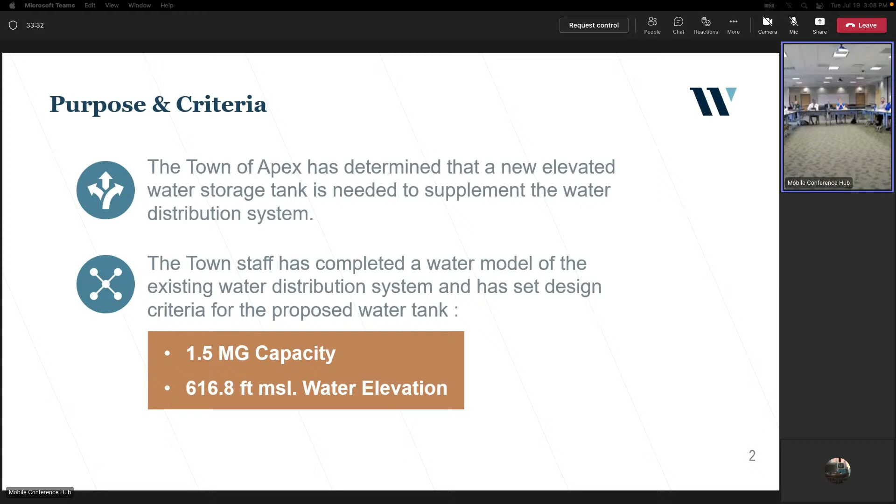The criteria established initially came from running the water model the town has for their existing water distribution system. We determined that we need 1.5 million gallons of water storage, and we need to maintain the water elevation in that tank to be equal to the existing tanks. Now, we will help distribute.

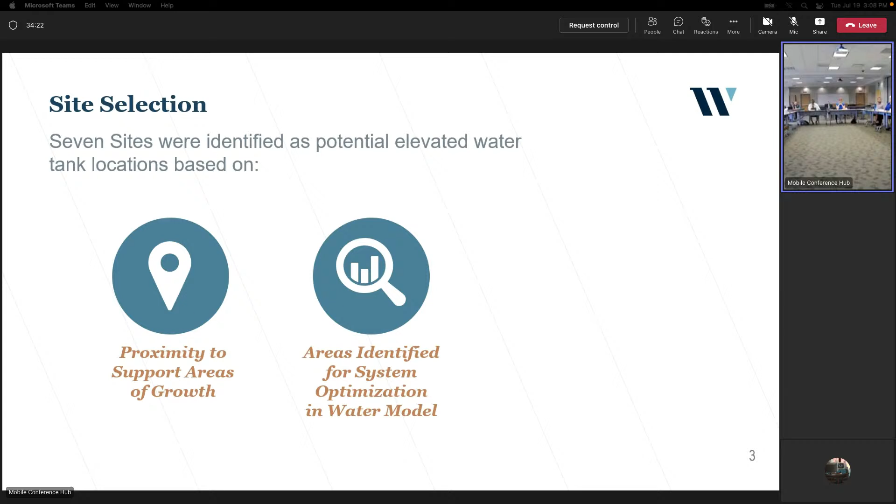Big, broad points: one, proximity to growth areas. Where are we growing? Where do we need this extra storage? So we look at the water model. Where does that show we need a tank? Where's the extra pressure needed? Where's extra storage needed in the system? And then, where can we put the tank? One important thing here is just because it's technically the best place doesn't mean that it's feasible.

Can you go back real quick and describe why being spread out matters? I don't quite understand the science of water tank storage.

When you put in elevated water storage, it runs through a pipe into every house throughout the town. The farther the pipe runs, the less pressure is available, so you're losing pressure along the lines. If we spread those tanks out and the system's all connected, we can boost that pressure throughout town as the tanks are spread out. Does that make sense? Yeah.

Is there a model of where we're lacking pressure or where we'd like more pressure today, or is this more about where it's going to be in 10 or 15 years?

I think it's a little bit of both. The current water model the town maintains, and it's not run by us I don't think, gave us information on general areas of need. We're currently working on a long-range water resources plan, a separate project that will project our water use needs 50 years out into the future. So we'll be hearing about that.

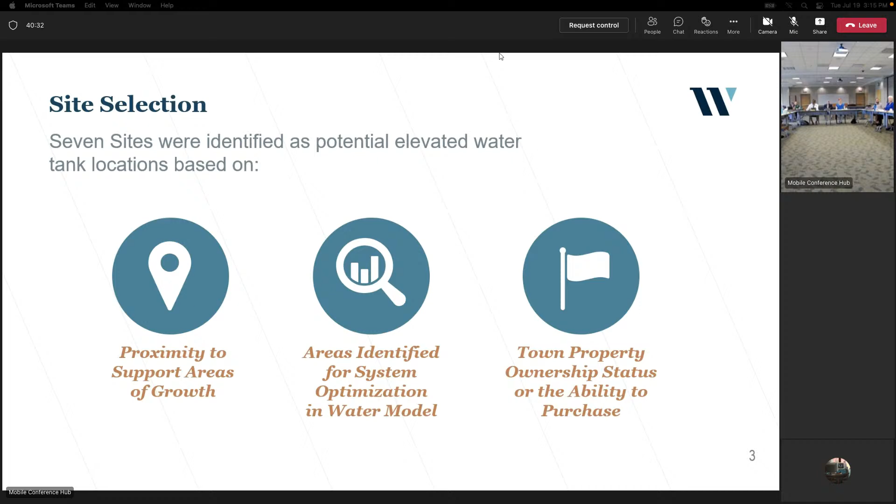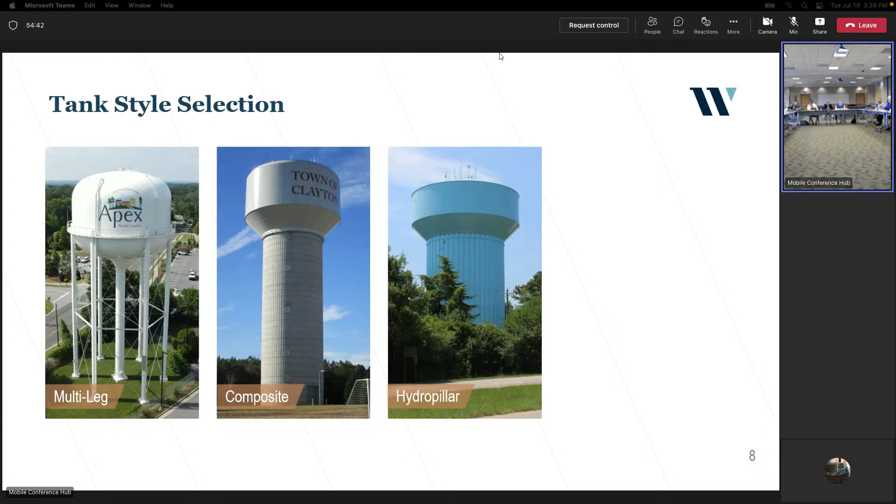Okay, so the second criteria, or the second thing we evaluated, was tank style. Those are the 4 styles, the multi-leg tank the town has now. We have 3 downtown tanks. Composite tank, which is basically a concrete center column with a steel tank on top. Hydropillar, similar, but it's a steel column with a steel tank on top. And then a sphere.

Again, we looked at objective criteria: capital cost to install, what's it going to cost to maintain, how does it look. The newer ones have more interior space - what else can we do in that area? We need to fence it off and block that area away. And then, communication - is it available to lease out for a cell phone tower?

And life cycle - let's put some of that stuff together. So again, these are not equal criteria, and we weighted those accordingly. Notice the cost was about 70% of the evaluation here. And then the composite tank was the highest scoring by a good bit, mostly because it's the cheapest to install, has the second lowest maintenance cost, which led to the lowest 20-year life cycle cost. It also offered the interior space - you have some options to do something with there.

Was there an attempt to marry the location with the interior space benefit - does that matter more at a park versus by itself? It seems like it to me. It could. It can be used for just about anything.

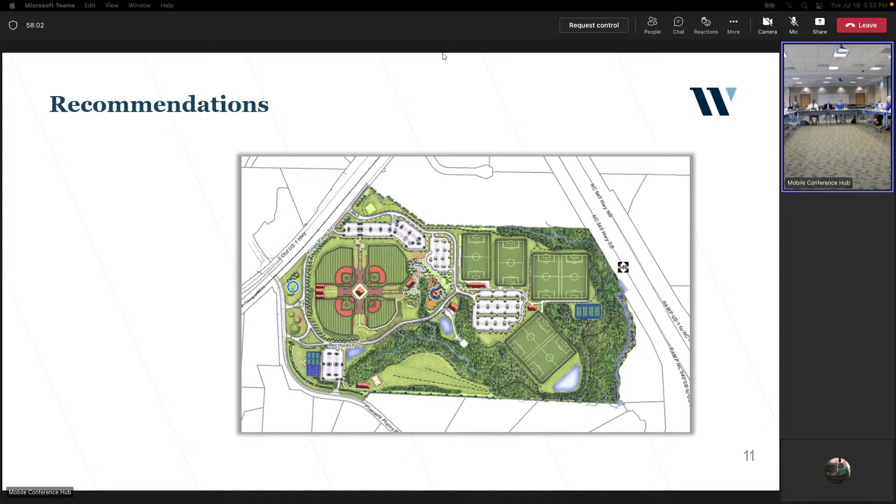So for recommendations, you see the little blue circle on the map of Pleasant Park - that is roughly the size of the composite tank. You can see the footprint. Is that the base or the top? That's the top - the top of the tank is about 87 feet.

Are there any concerns about consistency across our water tanks, or is that too much of an issue? To me, if we've got a bunch of multi-leg ones now, why aren't we getting another one? We talked about that, I have a slide on this. But yeah, it's really not a concern there. What this is showing is really site specific - there are times when maybe we would recommend a multi-leg tank like you have now, but we're moving out of town, it's a new location, and the consistency isn't like the 3 tanks you have now clustered together. This will be all by itself. I'm just good from the aesthetics standpoint.

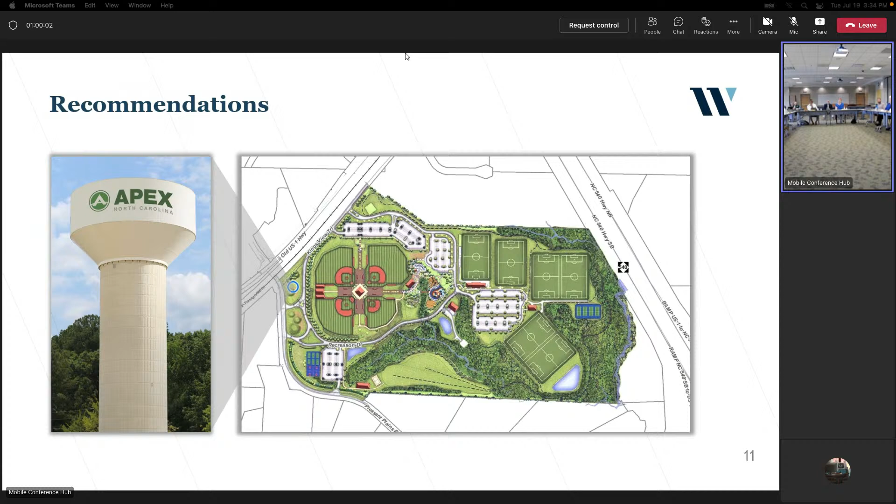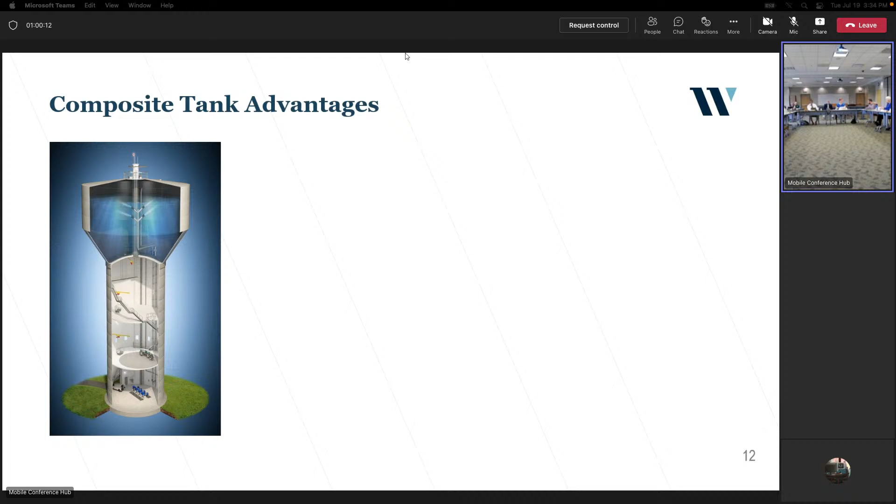Along with that, you do have the multi-leg tanks now, and this would be a change. I'm saying, for the composite tank, the advantages are a little bit lower capital cost and lower maintenance cost. You have a concrete column there, so there's no maintenance - not having to go out and paint that on a regular basis. You still have to maintain the steel tank itself, which still has to be painted and coated on a regular basis like you do now, but you eliminate that extra painting of the leg.

Also, it gives you some additional uses like we talked about. You're looking at about a 50-foot diameter column. There's potential here for office space, conference space, storage - towns doing remote fire stations, EMS stations, police stations could use this. A standard tank with nothing extra still comes with overhead doors, and you still have clearly room to drive trucks in for maintenance on the pumps, the piping, or just for storage, or for a remote fire truck.

Some other things to note - you can see in the picture the stairwell is inside, so you're not climbing up a ladder outside in the weather. You're in a building climbing a staircase, so the safety - you get much higher safety.

Any piping or any of the communication wiring throughout all comes through that central column. There's not wires hanging up the side of the building, out the side of the tank. So aesthetically, again, it's a much cleaner and more modern look.

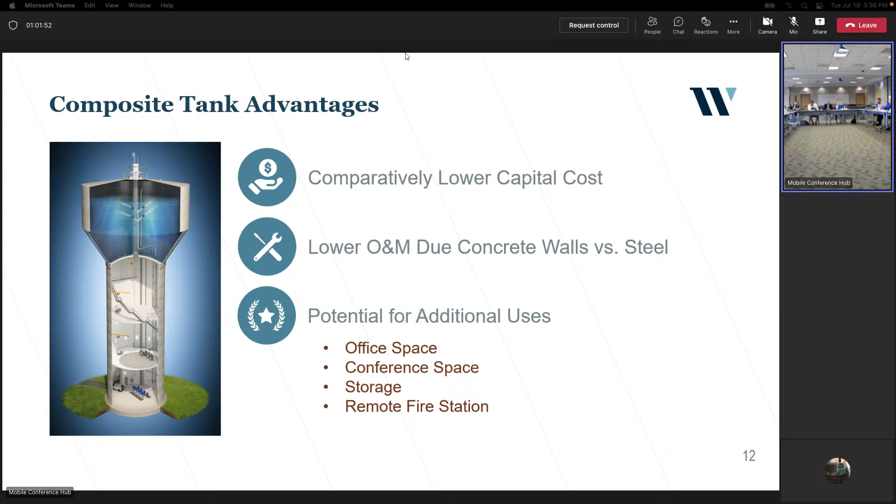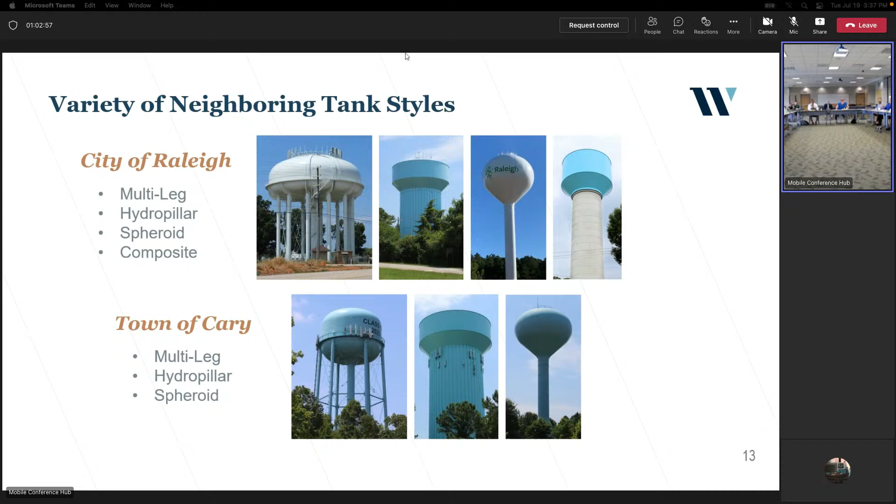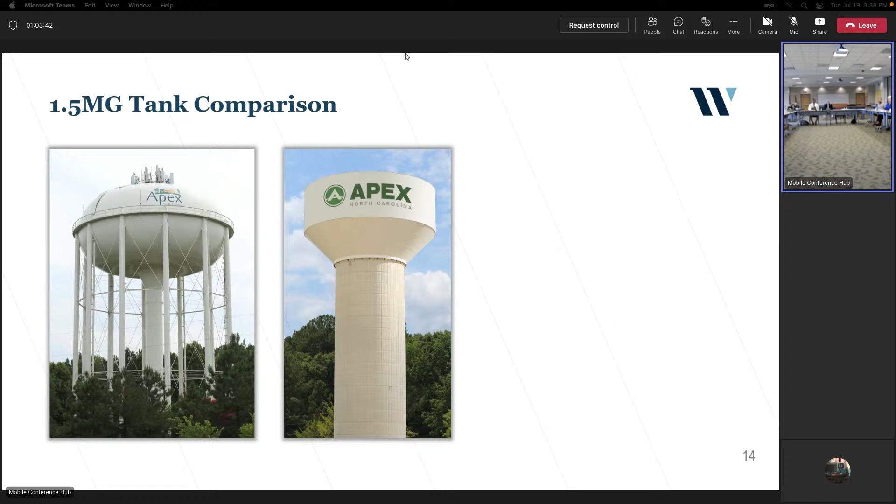Well, that - thank you so much. Anything? Done? I'm no, okay.

Did you want to go over that table in the back of that packet? Just to talk about one of the things that hasn't been discussed yet - the FAA potential requirements.

I don't know how your thoughts may change if we had to paint that tank a checkerboard orange color. That may be an FAA requirement. That's to be determined - I believe David may have the latest information about that.

Other than that, I haven't heard back from the FAA yet. We've submitted the application and we're still waiting to hear back. You see those types of tanks near PTI in Greensboro, Camp Lejeune, Cherry Point - they're all over the place. Worst case would be the entire bowl has to be that checkerboard pattern, which I think, at least in our opinion, would probably be a deal killer.

Alternatively to that, it could just be lighting. It could just be that checkerboard is painted on the tank, which you wouldn't be able to see from ground level.

But that is something David said, whatever 5-6 weeks, we're waiting on an answer of what they're going to actually require, just due to proximity.

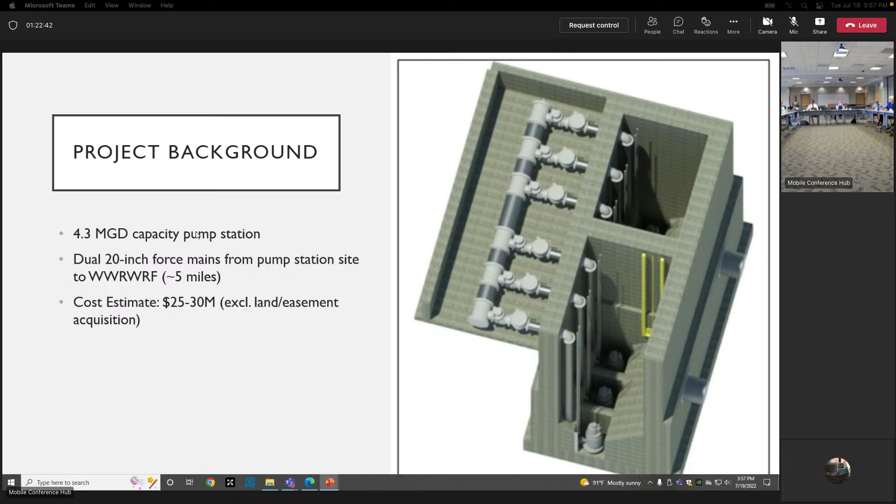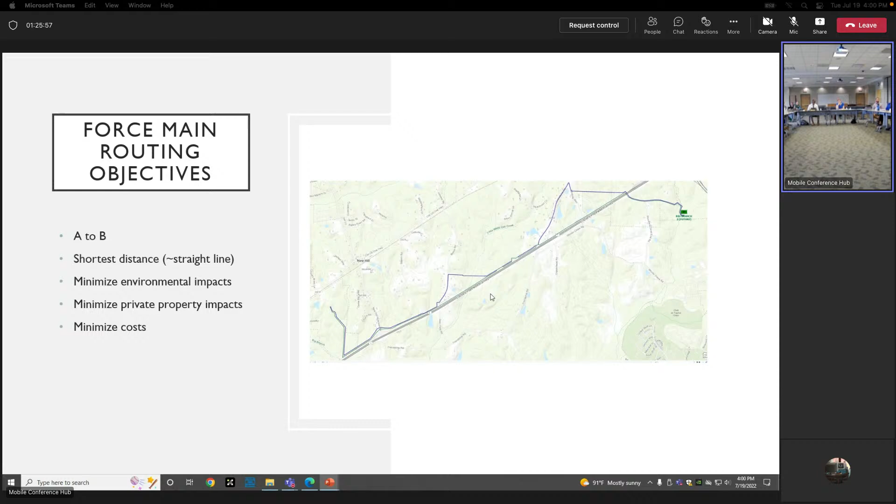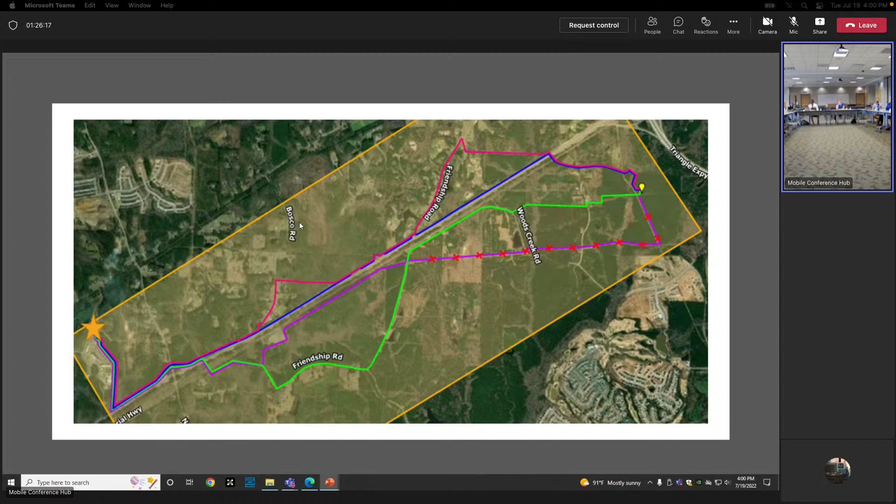We also looked at several other options, including some that are south of US 1, and some, this one up here, would be in easements on the side of US 1. So we narrowed it down during the preliminary engineering phase to these two alternatives.

It's kind of hard to see, but that blue line there is roughly what it would be if we're able to install it in the US 1 right of way. The purple line is the next best thing, installing in easements just outside of the right of way. Down here we're able to do that pretty well, but there are a couple of spots where there are structures or other obstructions right up against the right of way, so we don't have room to squeeze an easement and two force mains in between the right of way line and the obstruction. Hopefully that'll make more sense on some of these maps.

But this is essentially the option we're left with if we're not allowed to use the US 1 corridor. We've tried, we've put in a good deal of effort trying to convince DOT to allow us to locate in that right of way. US 1 in that area is a controlled access way, so their policy is to not allow parallel installations of utilities within those controlled access right of ways.

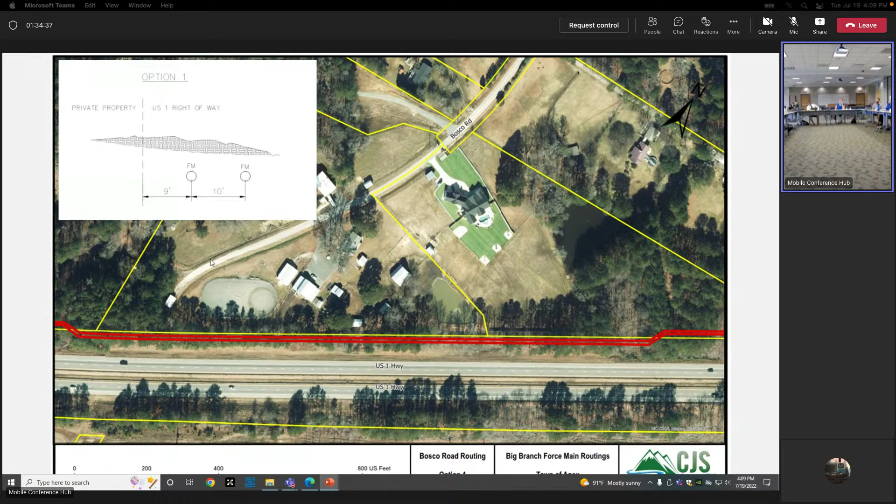Can they replant the trees after you put it in? We could probably minimize the 30 foot that's needed and just have a certain minimum width for maintenance. We wouldn't have to clear and maintain a full 30 feet. We could talk operations. Usually we'll do that through areas like this with impacts, so we only maintain what's really access.

Is there concern about the roots impacting the structure? This was another obstruction here, kind of the same deal. This structure is really close to the right of way line, not a lot of room. It looks a lot better if we're able to come inside the right of way line.

We would need approximately 30 permanent utility easements, 18 acres, and the force main length is 5.67 miles.

Compared to if we stay flat to US 1, our number of easements -- this is still outside the right of way, but we're avoiding those obstacles by using a directional drill, a trenchless installation, where we drill under it. We don't open cut things, so we don't really impact the property owner or the easement. We could even get what's called a subterranean easement, where they can do whatever they want above the ground, they're just not allowed to dig or drill. So these are, we think, good solutions to directionally drill under these two main structures here.

That allows us to stay pretty tight to the corridor. Directional drills are a more expensive way to install pipe, but we think with the property impacts we're saving, by the time, the number of easements goes down to 20 from 30. Still a lot of easements. Our force main length is down close to 5 miles.

One thing to note, I don't have a map for the inside, a map like this with a table for the inside of the right of way option, but it would look pretty much like this. Shift it down a little bit.

We would not be getting easements. Right now, we're getting easements from all these property owners, right? We're in the right of way. We don't need any of that. We'd really get down to needing easements just from the pump station site to US 1, which is about 4 properties that we would use. So if we can use the DOT right of way, we can get the number of easements down.

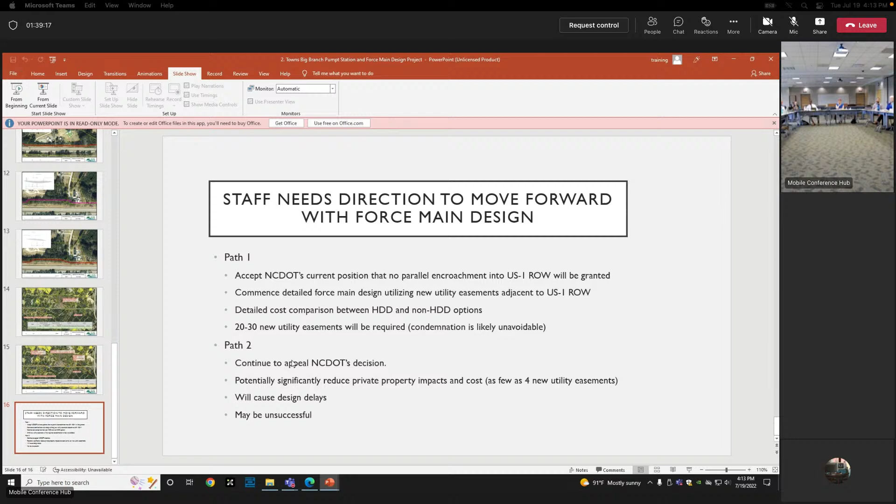Path 2, continue to appeal DOT's decision further up the chain of command. We think that we have a reasonable argument that it would really improve this project, greatly reduce the private property impacts, but it would cause design delays, because we're at a point right now where we're ready to get into designing the project.

Do you have any information regarding whether that process, the DOT process, towns have been able to build even smaller sections recently? Yes, so there's some precedent as well. In different locations, we have a couple accesses inside 64, like our little waterway - our water line actually goes inside the right of way there. But you have to look at it with a little bit of a different lens, because 64 has driveways off of it, and US 1 does not, even though they're both considered kind of controlled access.

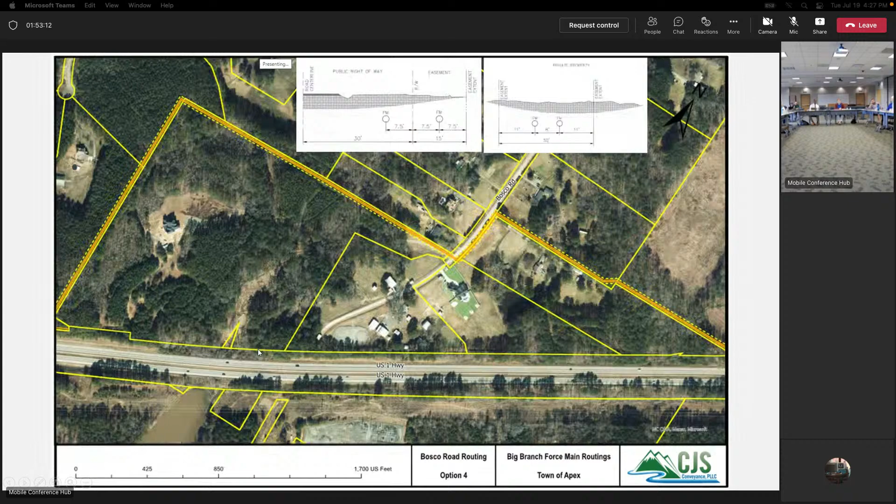And it's clear that we're talking about an easement that's adjacent to the property line by US 1, as opposed to... well, now when the letters, a lot of the letters that were sent were to these, this is the route we identified in our PDO. So we sent letters to anyone along Friendship Road, Winding Way, adjacent to US 1. We sent them down Bosco Road. Yeah, that's your option 4, right? Yeah, all these people got letters saying that we were going to come and survey. But it's likely now that we won't have to go that way.

Yeah, because you said we'd have to clear 30 feet, cut down everything, and have to stay clear. That seems really bad, especially along that route compared to going along US 1, even inside the property. A lot of that right-of-way on US 1's probably true as well. I don't think it's clear in full, but it's... so we might be clearing what might be an obstruction right now for their view of US 1. Yeah, that'll just be part of the negotiation process. And for that horizontal drilling, do you still have to take down the trees for that too? We're gonna go deep enough that it's not gonna impact them.

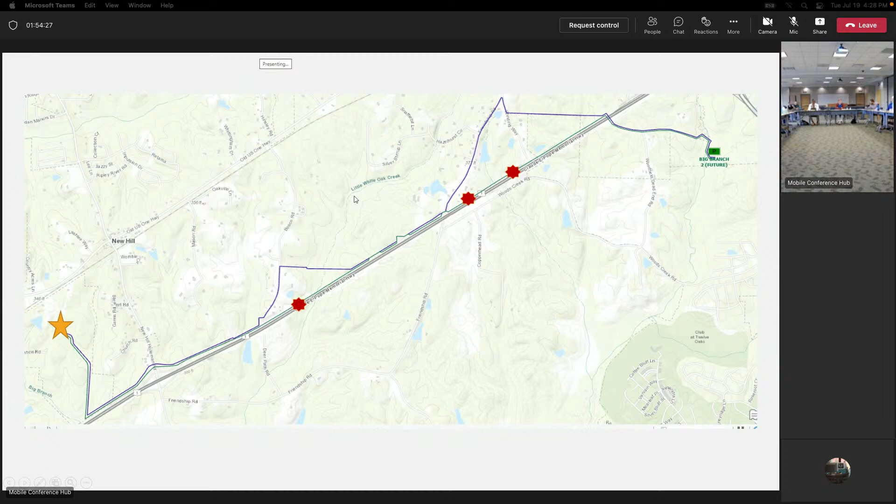What's the cost difference there? Would you say it's like 10 times? So I would say open cut is probably $250 to $300 per foot. For this project, if we drill it, it's probably $1,200 to $1,500 per foot. A little less than 10 times.

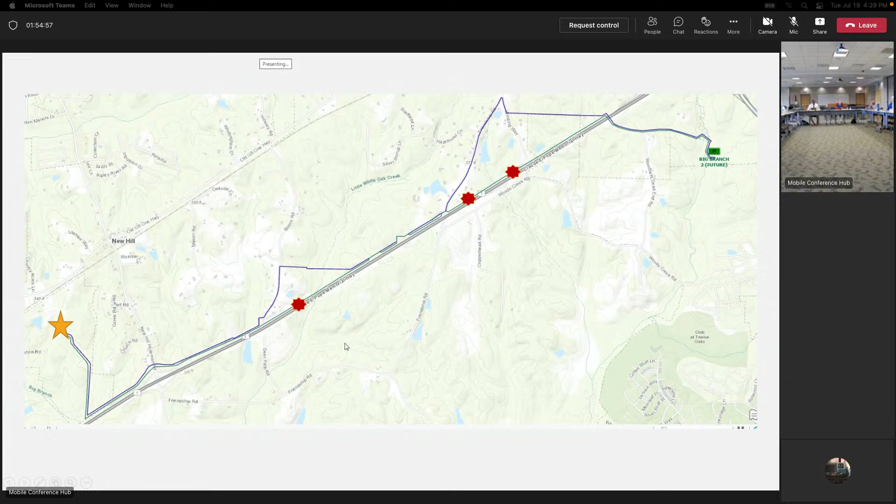But it allows you savings. Getting a structure might be cheaper. 0.7 miles. Yeah.

That's why we chose those couple places, because think about the costs associated with draining a pond, whether it's temporarily or permanently drained, and then moving the horses out of the horse farm during construction, and building the ring back, moving the shed. Those costs add up pretty quick.

So those are kind of a no-brainer. Let's drill through this area and keep on moving. But if we're talking about drilling more than what's necessary, then the costs are going to get out of hand pretty quick.

I mean, some of these places, to be clear, we would not take our line and go under a structure, under a building. We're talking about this being the building and us being so close to it that we can't make the excavation without impacting the building. So in that case, we could possibly bore past or directionally drill past that structure. But the physical pipe itself would not be under the structure.

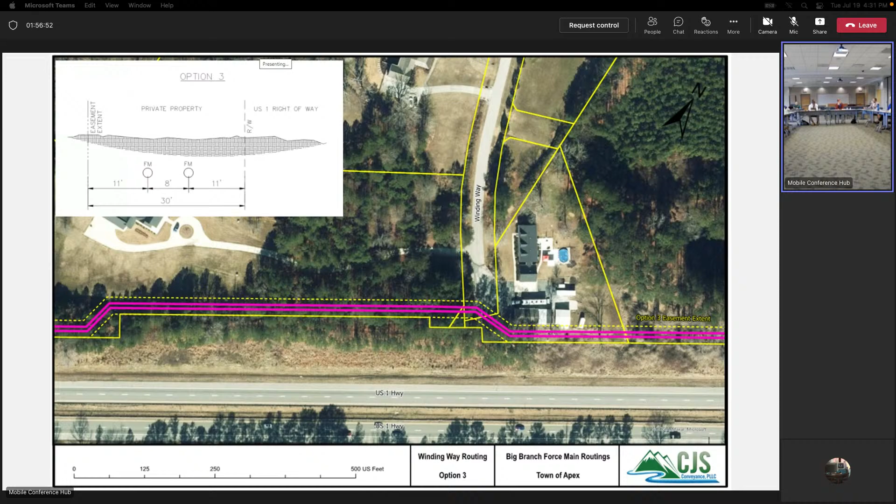Can we debate, maybe we should debate plan 4 versus 3 first, and then debate about getting higher-ups involved. Am I correct in summarizing that option 3 impacts fewer people, but more severely? The impacts are more severe to the fewer people. Is that correct? Can you describe it that way?

I think it impacts costs probably more than... well, okay, the blue areas—if we're drilling, we're just getting a subterranean easement. They can do whatever they want with the land other than dig or drill. So we're spending more money, but where those blue areas are, there's virtually no lasting impact to those properties.

Other than tree buffer—I think Diane knows a bit about this—this is buffer. They're not going to build a house or a structure or anything like that within what we would be taking.

How wide of an easement are y'all taking? Most of us are 30 feet. Yeah, it'll be fine because we have a requirement for a 50-foot minimum buffer, so 30 feet of 50 or 30 feet of 100. It's not going to be land they could have used for anything anyway.

But just the trees gone. Yeah, I know. And a lot of the reason we have buffer along these limited and controlled access highways is we know DOT is going to widen them in the future. 50-foot minimum buffer.

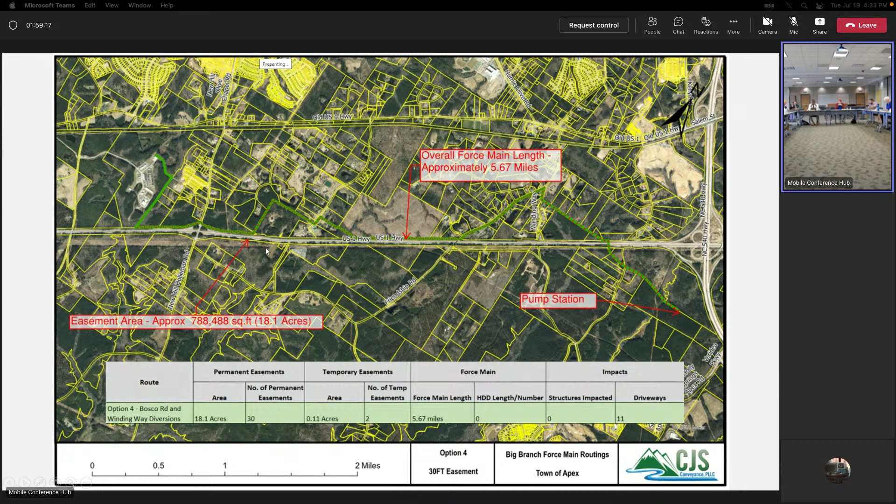I think we should do what it takes to stay along US 1. Is there a possibility for a hybrid model with DOT where we get in the right of way at a couple places, not necessarily the whole line, but can we get to the blue areas here? It would save us $100,000 or $50,000 or whatever if we could just bump into the right of way. I think that's a wonderful idea.

No, there's no but to it. Yeah, that's kind of what we thought would be our next task. But we still think they should let us in the whole way.

I've been hesitant to ask for small pieces because then the entire length is off the table. But yeah, that's a great idea. It would save us those directional drill costs.

Ultimately, what I think the ask is, the designers at a point need to move forward. We don't want to spend money on something we know council is not willing to support, not the way they would like to go. If they would say we would like to stay along that US corridor to the maximum extent practical, then our designer can start laying that out and have all the design.

They can know exactly what the instructions are going to be, exactly where there would be either an issue to need to directional drill, or maybe jut out in some cases. It may not even be to get out into it, it may be putting one force main in these really tight areas instead of having it 10 feet off the right of way, put it on the right of way.

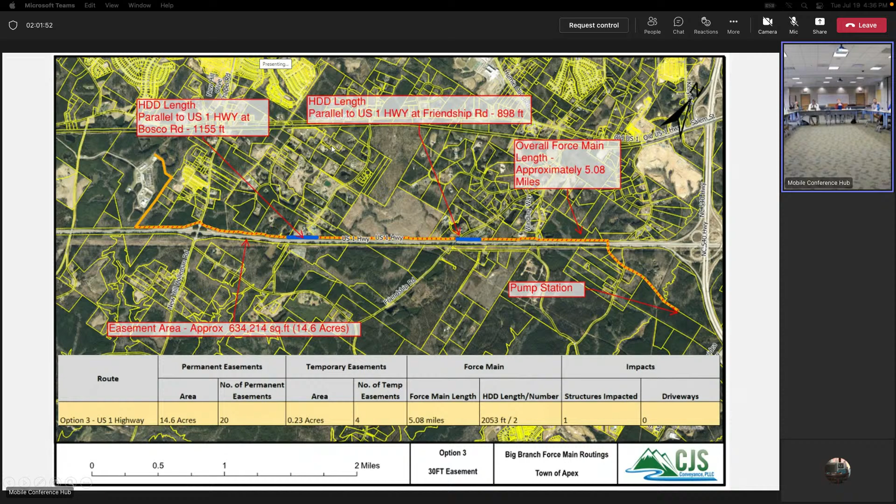I definitely think in those areas, you think they're going to jog the road out a little bit wider for some odd reason. In those areas, I think definitely, if it happens to correspond to an area we need it, there's one right there. I don't know why we would have to go up and around.

But obviously if they go the road, they're going to be following dot to dot, yellow line right there that's parallel to the road. So those are the things you don't get to until you get a final design, up to your elbows, right?

So I think if we know that's the route we want to go, Mike and them could work with the consultant to get that. Is that accurate, Mike?

So it sounds like we will proceed with the just-outside-the-right-of-way alignment, and maybe even have further discussions with DOT on those short segments where we're planning on doing this. That would be my preference too, is attempting that and negotiating with those little pieces here and there.

So I think if we go to DOT, it's about a concept and plan that's more powerful than a concept. Because a concept, I can draw a line across anything, right? It looks great on a piece of paper, but it may not be buildable.

So when we're talking concepts with them, when we haven't really dug into the details, it's hard for them to really put a lot of effort into it. But if we go to them with a design they can see as a survey, here it is, this is our impact, this is where we need to go, I think that's more powerful.